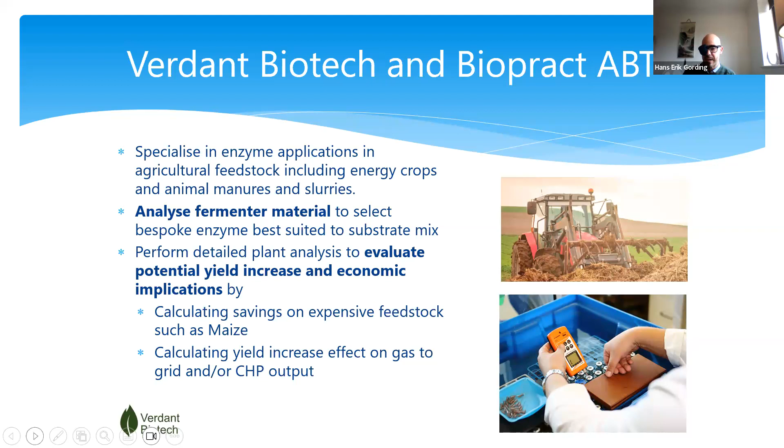So Verdant Biotech and Biopract, we work together in the UK. Our background is enzymes, and we are able to provide a number of services to plants, such as analysing fermenter material to choose the most bespoke, best enzyme for that substrate mix. But we're also able to calculate potential savings and improvements to plants, such as the reduction in expensive feedstock, such as maize, or what a yield increase would mean in real terms on gas to grid or CHP output. Next slide, please.

Next slide, please. So the results were very interesting, and they started fairly slowly. So the first 10 or 11 days, there was not a huge amount going on. And we suspect it may have been that the methanogens had been refrigerated, they were a little bit dormant, they hadn't been fed. But after about 10 or 11 days, in all groups, the methanogens came to life and started producing biogas.

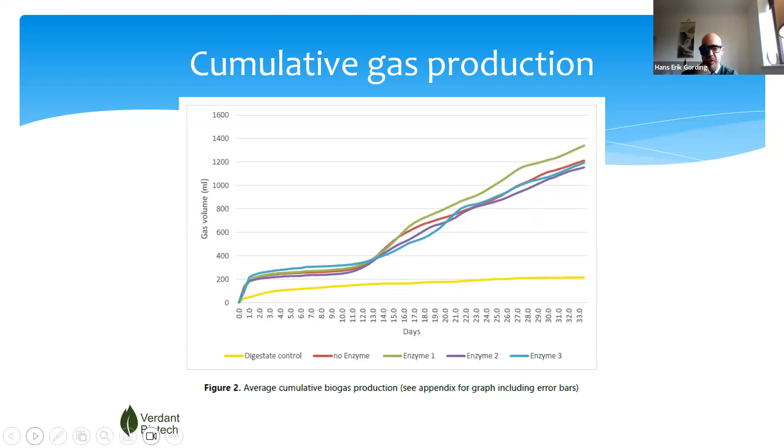But what is more interesting is that enzyme number 1 drew away quite quickly after about 17 days. There was clear water between that and the 2 other enzymes, and also the no enzyme control group. So that was certainly notable and very interesting. Next slide, please. And from the raw data, we could also look at the amount of biogas produced per gram of organic volatile solids.

And again, no enzyme, enzyme 2, enzyme 3, there was no real statistically significant difference between those groups. But enzyme 1 actually had quite a marked effect.

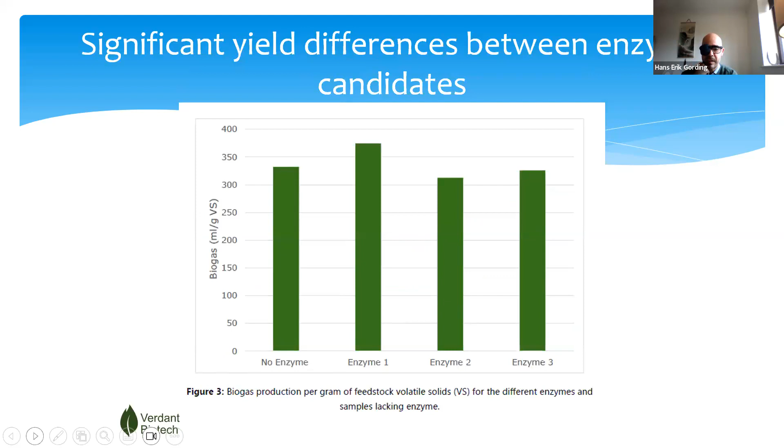Next slide, please. So the conclusions of the report were that enzyme 1 increased biomethane production by 13%. This was in a very animal manure rich substrate mix. Enzymes 2 and 3 had no real effect, and they were -6 and -2%, but it's unlikely that the introduction of enzymes would worsen the biogas production. So it's somewhere within the margin of error.

But the important conclusion was that all enzymes improved the quality of the biogas. There was a higher proportion of biomethane than carbon dioxide compared with the control group. And the conclusion was that enzyme number 1, UltraPract, was the best performing of 3 enzymes.

Next slide, please. So why would that be? Well, we have the ability to analyze enzyme activities, and these were based on recommended dosage levels for all 3 enzymes. So enzyme number 1 in green, which is standardized at 100%. And we have enzyme number 3 in orange, which is the one in use at the plant at the time. And enzyme number 2, which is the one they have used previously.

And moving across, we have soluble cellulase activities. We have insoluble cellulase, which we call filter paper, because that is predominantly cellulose, xylanase, and glucanase. And all these are key building blocks to plant material. And they have varying amounts of these, and this would certainly be useful in breaking down plant material. However, enzyme activity number 5 is quite different.

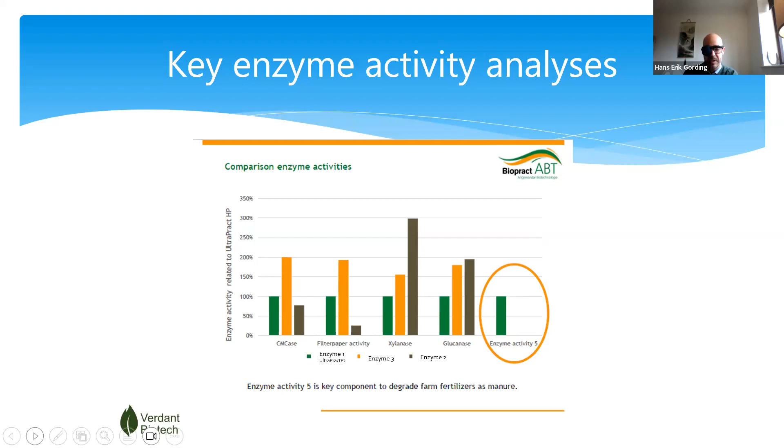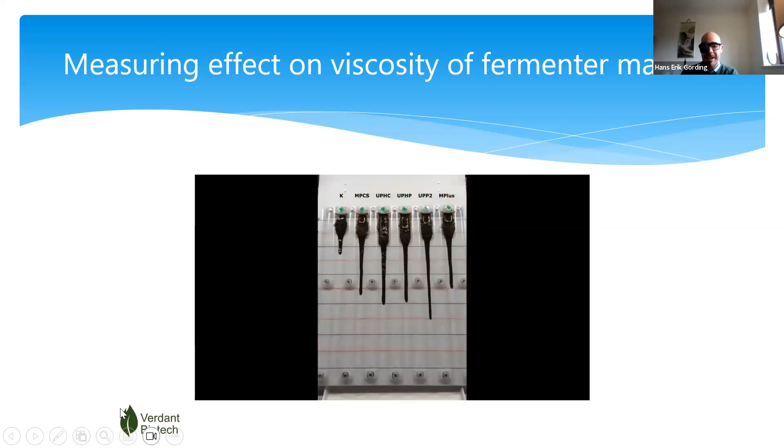So clearly something is happening. We are getting much better biogas yield with enzyme number 1. And what would that mean inside? Oh, you started it, okay. So what we did was to measure the viscosity of the various materials. So moving from left to right, we have K, which is the German version for control group. We have MethaPract, then we have 3 UltraPract variants, and then we have MethaPlus, which was in use at the plant at the time.

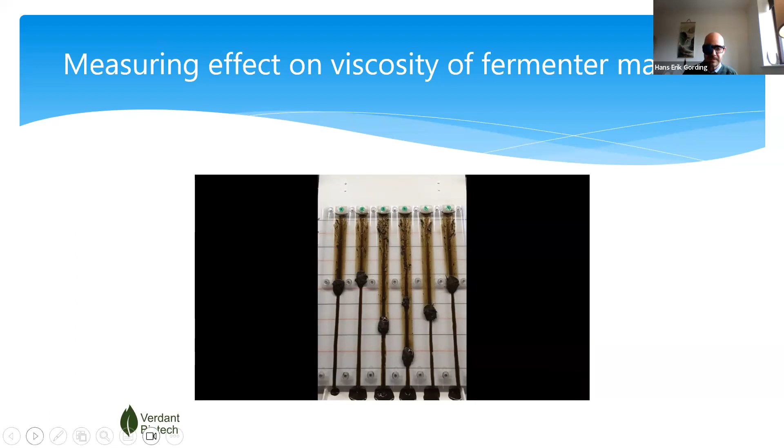And what you can see is there's quite a marked reduction in viscosity in the UltraPract ranges. And that means two things. Firstly, that more volatile organic solids are being broken down to make biogas. But the implication of that as well is that you'll have less energy consumption for stirring, pumping, less equipment wear and tear. But most importantly, you're having more biogas produced. Next slide, please. One more time, there we go.

Okay, so the conclusion and the economic implication is that we certainly do get a yield increase. It's quite a significant one with UltraPract. And we calculate the plant could produce exactly the same amount of gas grid input or CHP input by doing nothing but adding enzyme, and they could reduce their maize consumption daily by about 25%.

And that would mean that for a typical 1 megawatt size plant, we're looking at a 6-digit saving just in feedstock alone. And with the high maize price at the moment, partly due to poor harvest last year, but also the conflict in Ukraine, maize prices are at pretty high levels at the moment and will continue to be so for the foreseeable future.

Alternatively, the plant could also keep using the same amount of substrate every day, and they could increase their gas grid injection by about 11.5%. So this is 24/7, 365 days a year. And depending on what approved scheme they're on, that could also be worth a lot of money.

But ultimately, it will be the plant's decision of how much maize they want to save, how much more gas they want to produce, and somewhere there'll be a perfect point where they get the best of both worlds. And from our experience, the economic gains from using enzymes on this substrate mix are quite significant. For every pound spent on enzymes, £2 are returned in increased profitability for the plant. Thank you.

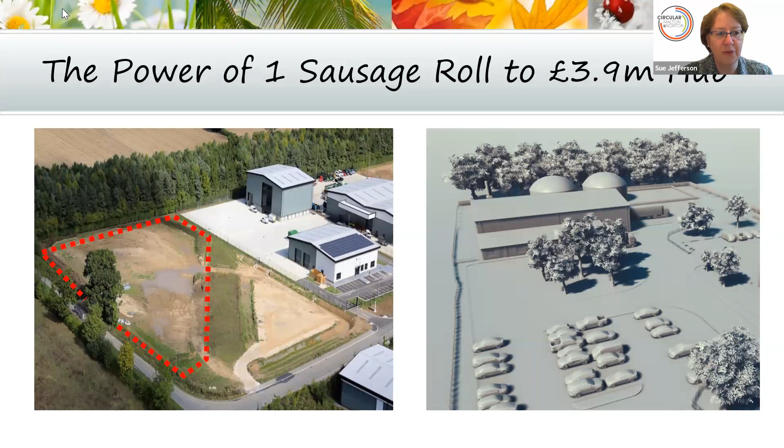And now we've identified a site, we're in the process of seeking planning permission, and we've got a business model where we now need to raise £4 million for that. So let me share with you some of the feedback that we've had from the public, and this is actually both business and residents.

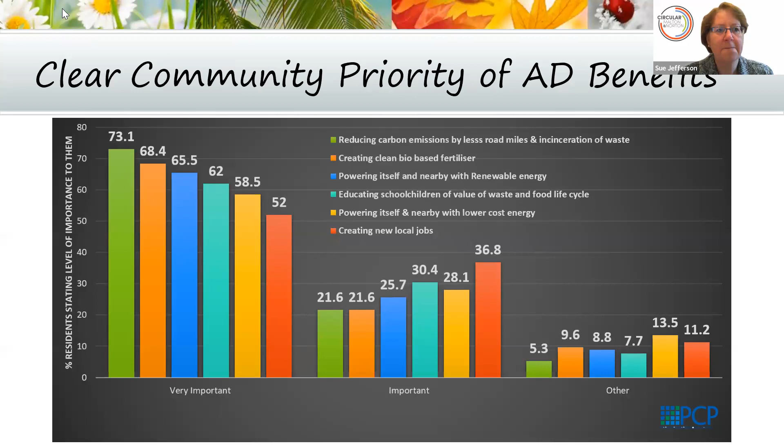And what I wanted to highlight was, this is by listening to people and putting in place elements that are important to them and show they're listening. It's not being done to them, but with them is really important. And that education bit, you can see it's appealing. And the point, which is why we're looking at the circular town, is we feel that people often feel they can't make a difference, or there's too many barriers in the way. This is one that very much is something that by supporting it or by being involved, they can make a difference.

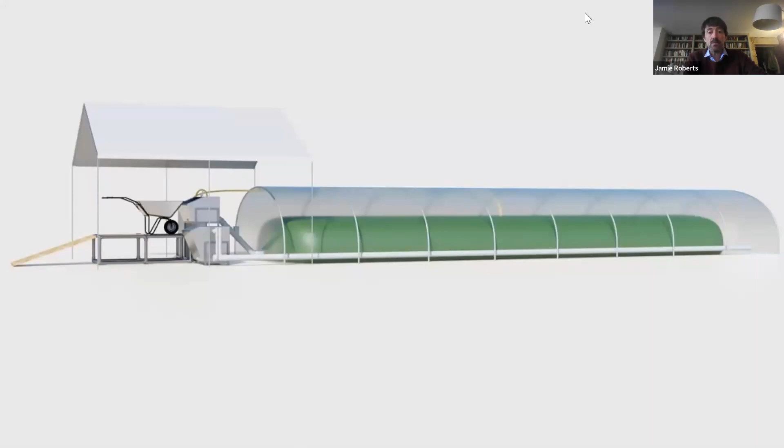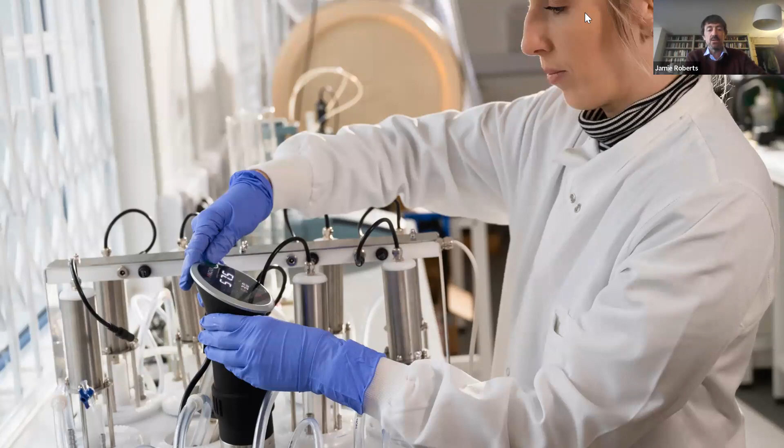So this is where the BDC and the ADSI project became involved for us, because we wanted to know which of these feedstocks had the best biogas potential. This was round about earlier this year. I bagged up 5 or 6 bags of unpleasant, foul-smelling feedstocks, drove over to York, and dropped those samples off with the BDC guys, and then at their lab, they started to test the biogas potential. And this is where we got to at the end of that process.

As you can see, each of the feedstocks behaved differently. But what I was particularly happy to see is that the one material that I've got right on my doorstep, and I have the most of, the fish sludge, actually performed the best. It came fairly quickly to producing biogas, and it maintained a good yield over a long period of time, whereas some of these other feedstocks were more of a slower burn. They'd get there in the end, but they took longer. And then actually we did a mix as well, which performed very well.

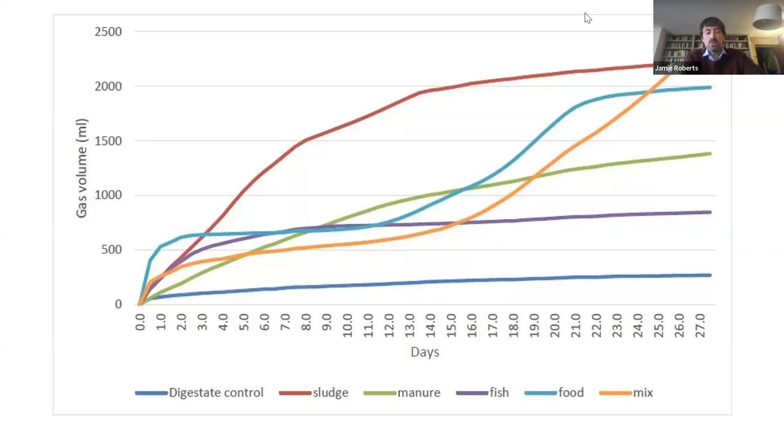It was slower to get to a point of producing biogas, but once it got there, it really peaked out. So that was great for us, because that really told us that, yes, we've got materials on the doorstep that we can get to our AD very quickly and very easily, and they're going to perform well and produce a large amount of biogas for us.

We did another ADSI project as well, which the BDC did for us, which was basically a kind of desk-based study in terms of what's going on in vertical farming, what some of the different systems are, whether it's hydroponic or aeroponic or aquaponic, looking at some of the high yield or high value crops that we could grow within this containerized system, and then looking at some of the costs that we're going to have to think about in terms of the high energy, and how AD would help to mitigate some of those costs. So that was a really good, useful, valuable desk-based piece of work, which has helped to influence our final scheme.

This story has a very happy ending, because out of the collaboration that we did with the BDC, we were actually able to come up with a full project idea, which was to test the containerized off-grid growing system within our quarry here in the Yorkshire Dales. We submitted an application to Innovate UK, and we were very happy to hear about 3 months ago that we were successful. We now have a 2-year project, a collaboration between ourselves, the University of York and the BDC, where we'll be testing this containerized system.

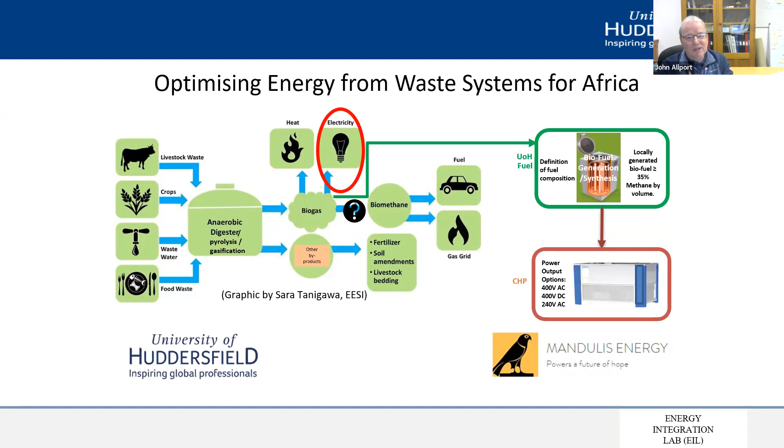So that was one of the first projects we were doing, and since then, and through links like this, we've been talking to all sorts of people, and the whole project has just snowballed. So this was probably this time last year. So we're only talking 12 months here that I'm going to run through, and just to show you the progress we've made in 12 months.

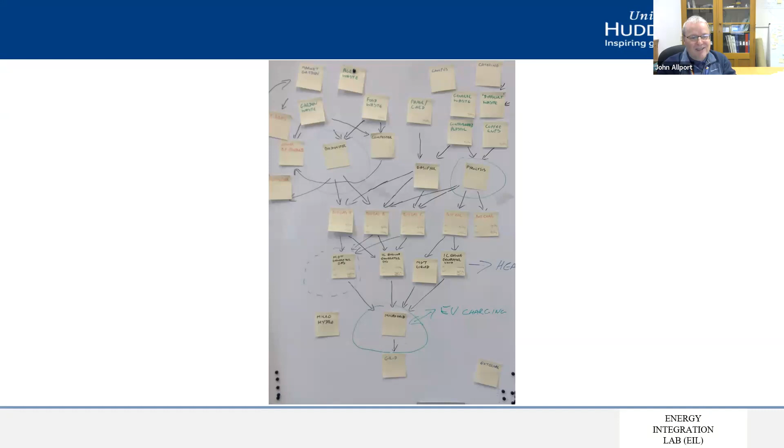So we brainstormed it all. This is my typical way of brain dumping onto post-it notes, and so we started off with microgrids, and then how do we generate power, and then we'll use biogas and biofuels, but what are they and where do they come from? How can we generate them? What are the feedstocks? So we put all this together in a brainstorming exercise, and out of that came this vision as the university as an energy integration lab.

We've got lots of, I don't call them waste streams, I call them fuel streams now within the university, because we realise that if it doesn't actually leave site, it doesn't actually become classified as waste, and therefore we don't pay all the usual waste disposal taxes and things like that on it. So there's a huge interest within the university as can we actually use these resources and generate power, which we can then feed back into the university.

So that's how I've managed to persuade the university to give me a significant chunk of money to put this together. And that's what I'm going to talk to you about now. And biodigestion, AD, is a part of that. But I'm just putting it in context with everything else that we're doing, so you can see where AD fits alongside what we're working on.

So our project specifically, or our first funded project, we're now on to the second phase of this, within 6 months even, was to look at, can we take waste from local companies and the university catering outlets and all sorts of other waste sources, and figure out what types of gas we produce from these different wastes. So similar to the sort of thing that Hans was on about, and that Jamie was on about, what with your different wastes, what types of gases do you produce?

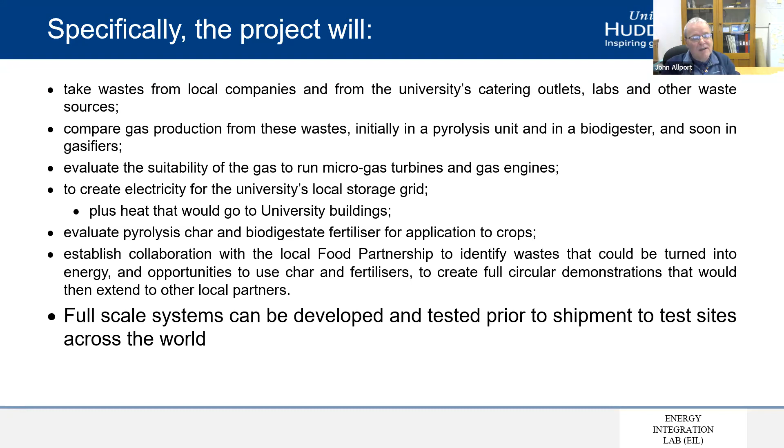So our biodigester, we got a tiny little biodigester, which is great. It's small, for biodigester scale. We have a total capacity of about 350 litres here. But the advantage of that is we get a relatively quick throughput. So we can change feedstock and see what the effect is. So we've had this since March, and we've been running different feedstocks for about 3 or 4 weeks at a time and seeing what the gas production is, what gases we get, analysing those gases.

And we've had master's students and PhD students feeding this thing all sorts of different foods. So it ran for a month on chips. Biodigesters don't like chips. They give it indigestion. They really do not like chips and pasta.

But we then got it into green veg, and it felt much better then. So we've got much better results from green veg, and then we're trying different proportions of mixed waste. And so we're doing a lot of work around what is the best way, in the same way as you've done, Jamie, with your different feedstocks. What's the best sort of mixture to get the best production from this?

And some of the work we're also talking with EcoNomad about is similar to what Hans was on about, which is what are the best bacteria to run in this. We started off with an initial charge from a farmyard biodigester, but as we've analysed what's coming out, we're getting sort of changes in the bacteria constituents, and these things are evolving depending on what the feedstock is. So we can see that we can optimize by maintaining the same feedstock.

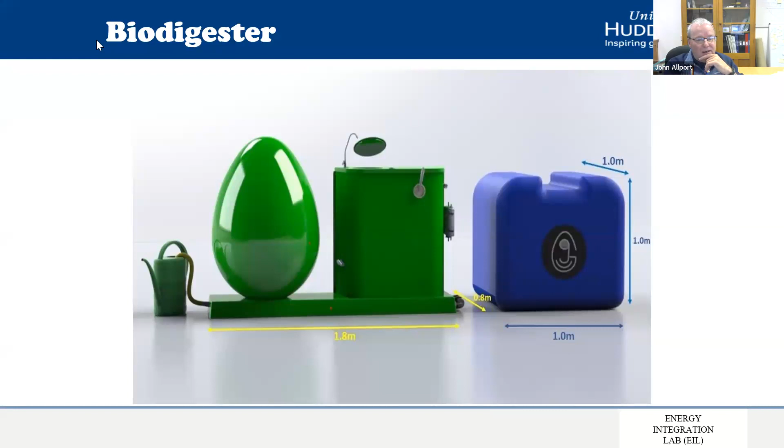So we're a little bit over time, John. So if you could just, it's fascinating, but thank you. You'll find that with me. I can talk about these things for hours. I normally have to students.

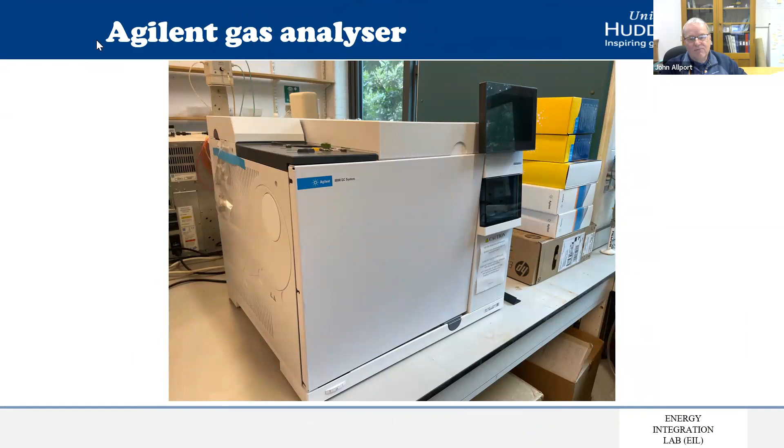But yeah, we've now got a brand new gas analyzer, which is really helping with analysing the different gases. So that's really proving useful. And we've got a team working on pyrolysis. So this is our micropyrolysis unit, which is designed for home use. So again, we're looking at home scale or small scale devices. So this actually is hiding there behind Freya, but it's a unit which would sit in your kitchen.

You basically put all your household waste into it, and as long as it's carbon based, it's organic, it will pyrolyze into biogas, which at the back then of that unit we've got a standard gas boiler, which this gets co-injected into, which reduces the gas consumption of the boiler. So these are the sort of technologies that we're developing. This is our map as to where we're going.

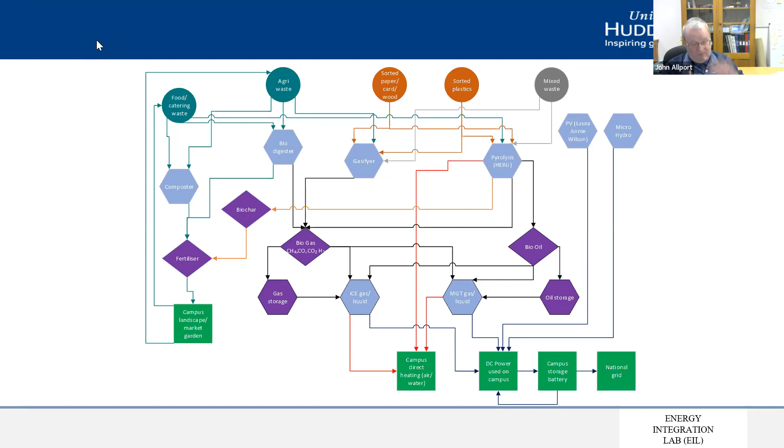So yeah, composting, biodigestion, gasification, pyrolysis, along with photovoltaic and microhydro, all feeding through into our battery systems, and then ultimately, if we need to, into the grid. And it's CHP, so we've got heat going direct into the university as well. This is the plan. This is where we're at the moment.

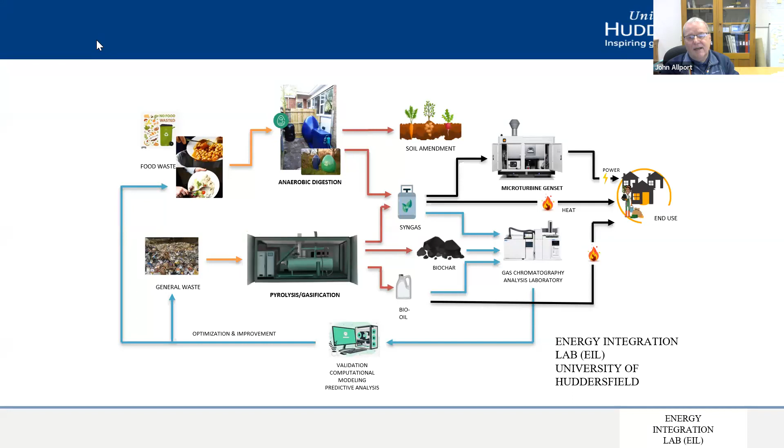So we're not quite there with everything being integrated, but we have got food waste going through the anaerobic digestion. We're looking at general waste and other wastes going through pyrolysis. What do we get from them? Testing that, computational modeling of it, generating power through the genset, and testing that power in end use.

So, this is a team that's currently working on it. So we've gone from an idea 12 months ago to a full-time team of 7 people currently working on this. We've 2 new starters coming in next month, and we've just been awarded another £350,000 to continue on with the project to the next phase.

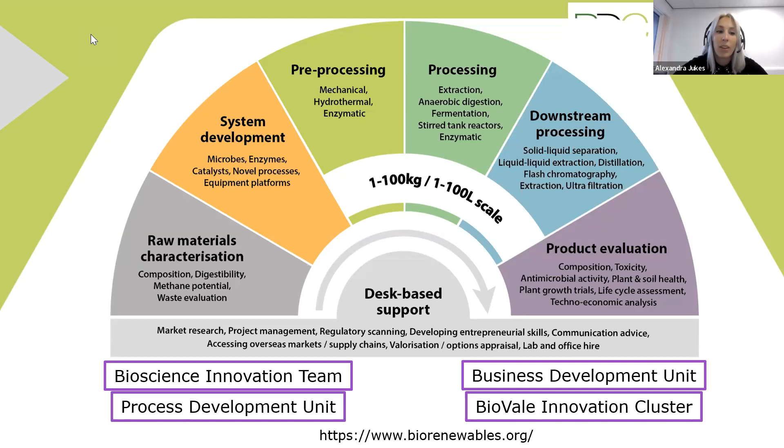Okay, so how we work, but sort of more of how you can work with us really and access BDC facilities. So we have multidisciplinary activities. Our teams are made up with biologists, chemists, business people, engineers, and a wide wealth of different experience. We're well placed to move fast, responding to client needs as they arise, including wraparound services, help with regulatory bodies, health and safety, or identifying funding.

As well as using our team to complete projects, we also offer facilities for equipment or prototypes to be brought along and tested in an independent environment with expertise on hand. We currently have a partner in one of our larger projects who've brought their 1 tonne per hour prototype feedstock treatment unit and are now based in one of our units. This has been really great because it's allowed us to work directly with them. So they treat materials and then we can analyse them pretty much straight away and carry on processing on those materials. So we've been doing dark fermentation with material that they've treated.

It's removed the need to worry about storage, like freezing samples and changing a sample matrix. But it's also allowed us at small scale to more closely mimic the continuous process that we would have in real life. But as well, we've also been able to just work together more closely, get insight into 2 different parts of the biorefinery process, streamlining it and spotting kinks and just being really collaborative, which will help before we go to demonstration scale.

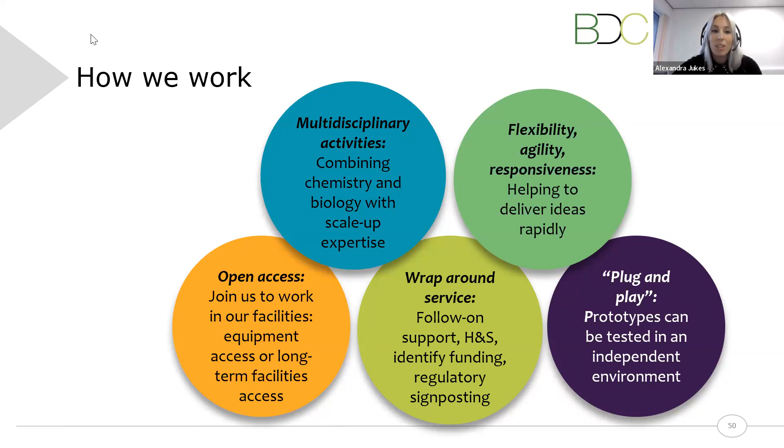So yeah, as I mentioned, I kind of lead the biogas area, which is one of our core areas. So similar to the previous slide about biorefinery capabilities, we can work across all areas of biogas production. So starting with feedstocks, can we treat a feedstock to produce more gas? Can we extract valuable compounds first? So we had a project where we first hydrolyzed and extracted sugars for fermentation to platform chemicals, and then we took that residual solid for anaerobic digestion to evolve methane.

We can look at the process itself, optimizing parameters such as temperature, pH, loading to increase the volume of methane produced per gram of material. So we're always looking to make the process more sustainable and productive. We have a lot of wraparound analysis to characterize materials going in, coming out, and also during the process. So for example, we can monitor volatile fatty acids throughout digestion to understand when the process is overloaded or underloaded. And this helps us balance feeding rates and residency times.

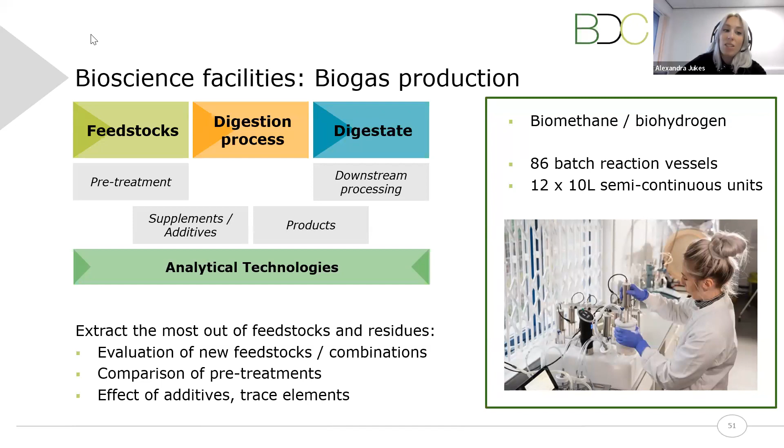BDC has also worked with a few companies that have products designed to increase methane production. So we've provided independent testing of these products to confirm effectiveness and also start building a portfolio using different feedstocks and inoculum. At the end of the process, we then have the digestate, which is still full of compounds. As we've mentioned in previous talks, typically it's used for fertilizer. So we can analyze this material to see how suitable it is as fertilizer. And we can also explore other uses for the material, so extracting valuable platform chemicals or using it as a growth medium. Yeah, there's a real wide range of things you can do with digestate, so it's interesting to keep that open.

So yeah, I just thought I'd mention a couple of projects that we've worked on. So this project was with Natural England, the University of Hull and Teesside University. And it's interesting because it brought together a few different sides. So Natural England wanted to improve the biodiversity of some of their sites. These sites are managed by volunteers, so they didn't really have funding to look after them. So their idea was that if they could use material from these sites for anaerobic digestion, that income would then fund further volunteers and let them look after their sites more closely.

So BDC and Teesside provided anaerobic digestion expertise. So we tested different materials, different inoculums from their sites to see which ones might be suitable, which ones produced high amounts of methane. But then University of Hull were looking at the effects of these management ideas. So if you were cutting material twice a year, taking it away from the sites, what effect did that have on biodiversity and the health of the site in general? And obviously different sites were made up of different things. So we looked at salt marshes, we looked at heath, heaths with grass, loads of different areas, and every area suggested different needs. So for some it was cutting 6 times a year, for some it was cutting just once a year and removing that material.

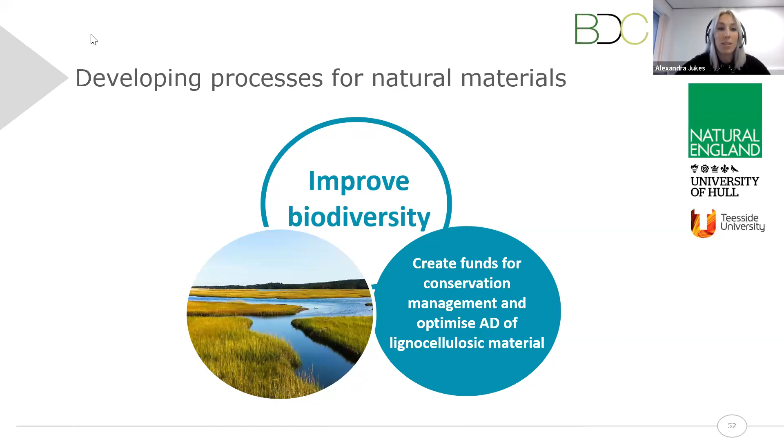And then the other project I'm just going to touch on lightly, because Debs is going to go into more detail on this, but we've been looking at dark fermentation for basically before anaerobic digestion, so producing hydrogen from feedstocks before they go into AD, so giving more value. This project has had a few challenges, and the biggest one we've found has been getting the right microbial culture to produce hydrogen, and then maintaining this culture and giving it the right feedstocks to then evolve hydrogen.

So we've been testing out different types of heat treatment for the inoculum. We've also been testing cavitation and ozone. So with the inoculum, basically what we want to do is reduce the methanogens or completely get rid of them, but also increase the amount of hydrogen producers we have by causing them to produce spores via stress.

So we've found some really interesting results. Basically, the methanogens are pretty hardy, and as we increase the temperature, a lot of the time they actually increase their production as well. But then we get to a certain temperature where the methanogens just drop off, and then we start seeing more hydrogen production.

And interestingly, we see a similar trend with UV and cavitation. The more passes we do through the system, so the more exposure they have to that, we then see the methanogens dropping out, and then the hydrogen producers start to increase, which is great. But then we also have to maintain this culture, make sure it's happy, giving it feedstocks that it finds useful.

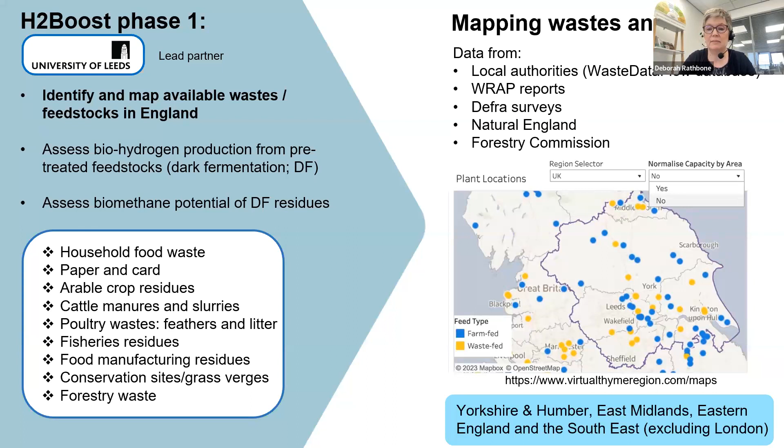And then the second stage was to actually prove the pudding: can we make biohydrogen from these feedstocks? So just showing a snapshot there, as Alex has already said, we were looking at inoculum preparation, just at lab scale at this point, looking at pre-treatment of feedstocks, and we're using a pre-treatment system developed by a company called Green Thread. And their system, the BioBooster, uses UV, ozone and cavitation and so on to really treat lignocellulosic, really tough recalcitrant feedstocks to make them more digestible.

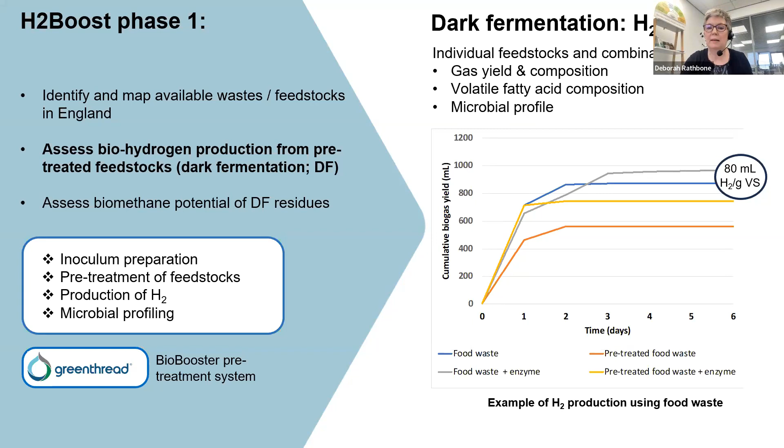And we showed that depending on the type of pre-treatment or whether we were using enzymes in the process as well, we were able to liberate hydrogen. And we also had a look at the microbial profile as well as the volatile fatty acid composition. So really trying to get a handle on what was happening in those dark fermentation vessels.

And on the back of that, we applied for phase 2 funding. And that's the project that has just started. Again, funded by DESNZ, this time to the tune of 5 million, and it's running between July this year and March 2025, with the bulk of the actual practical work ending in November 2024. So a fairly short, sharp project, and is bound to cause a few sleepless nights and increase the grey hairs, I think, along the way.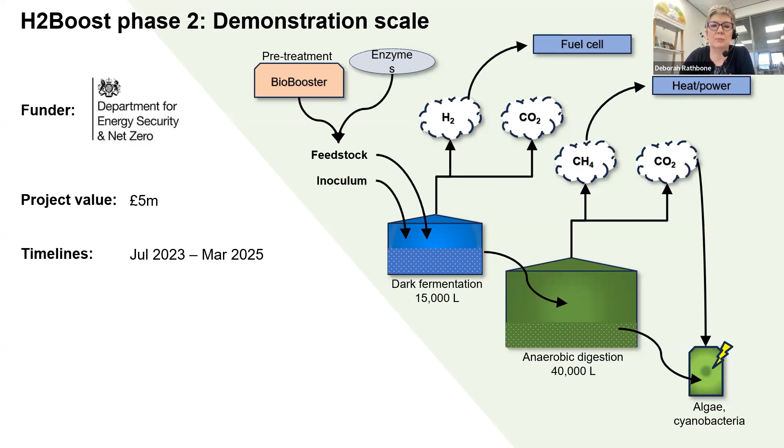So the different, just going to move my viewer here.

So the different activities within the project. So at lab scale, we're looking at inoculum development, the pre-treatment. As Alex said, we have the BioBooster system on site, so we're able to combine output from that with the various enzymes that we have. We're also, as part B of the project, looking at new enzymes coming out of the University of York, predominantly around lignocellulosic material degradation. So we'll have a chance to put some of those through their paces in the second part of the project.

So we're looking at the dark fermentation, the anaerobic digestion, and then working with our colleagues for the algal and cyanobacterial strain evaluation and growth systems. When we get to demonstration scale, build and testing, there's all the planning and permitting, the design, the build, the installation, and then 1,000-hour performance testing, which we need to pass. Running alongside that will be the hydrogen cleanup and the CO2 separation and storage.

We're very much wanting to make this a real practical exercise, and so alongside the very practical elements of it, we're looking at supply chain analysis, market engagement, the preferred scale to match supply chains, the sort of market value, I guess, of this, and then the sustainability elements as well, looking at life cycle analysis, economic assessment, as well as any regulatory and policy considerations.

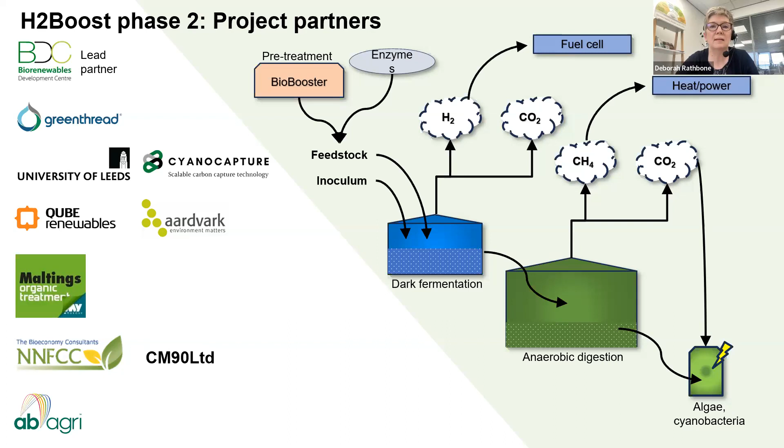All the demonstration scale work is being undertaken at the Maltings Organic Treatment, which is out towards Leeds and is not only providing site and security and services, but also supply of feedstocks. So very used to handling large scale waste streams. Then we have our colleagues at the NNFCC and also CM90 who are looking more at the regulatory and techno-economic and life cycle analysis, again with input from BDC into those activities as well. And then colleagues at AB Agri who are providing support with the analysis of the processed feedstocks. So a real team effort here.

So we're just at the start of this. We're, as Alex said, looking at inoculum preparation and the first of the feedstock pre-treatments.